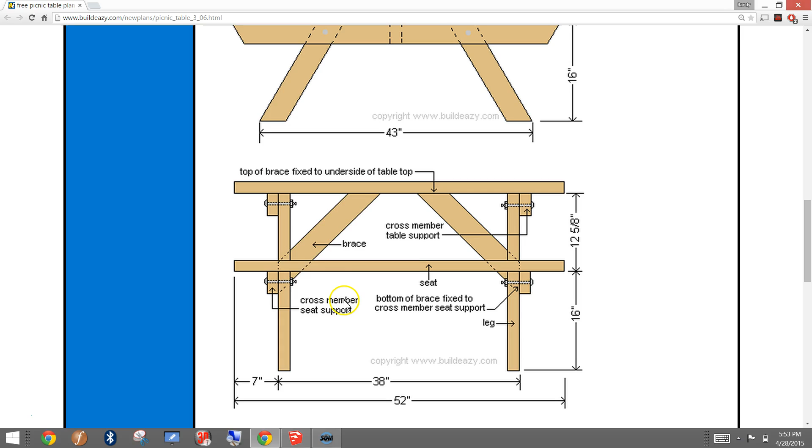This next section, I'm going to show you how to make the assembly here on the end, the A-shaped frame at the end. It's also going to include, for now, the brace. So we need the legs, which are these items. We need the two cross-member supports, and then the brace.

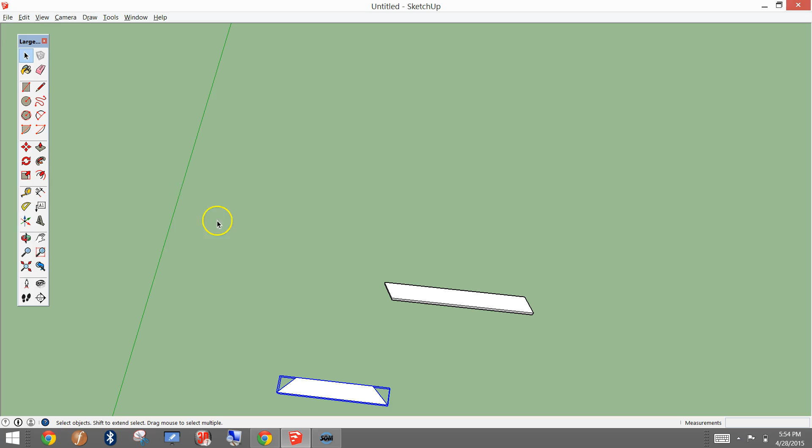So the rotation tool gets a little tricky. We're going to start by putting the legs up next to each other. Don't make copies of the components until you need it, just to keep things a little more simple. So we're going to take the leg here. We're going to use the rotation tool.

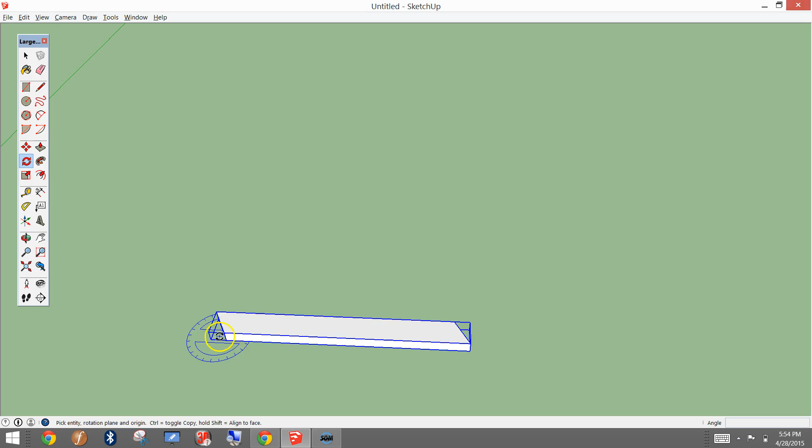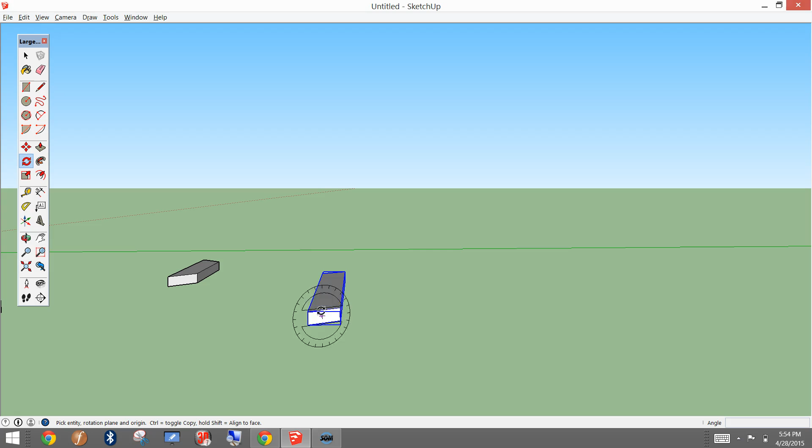Now, if there's one thing you remember, try and avoid when you get the black compass, because that turns things diagonally, and when you start turning it crooked, it gets a little more confusing. It's not impossible, but to avoid confusion, do your best to never, ever click with the black compass unless you really know what you're doing.

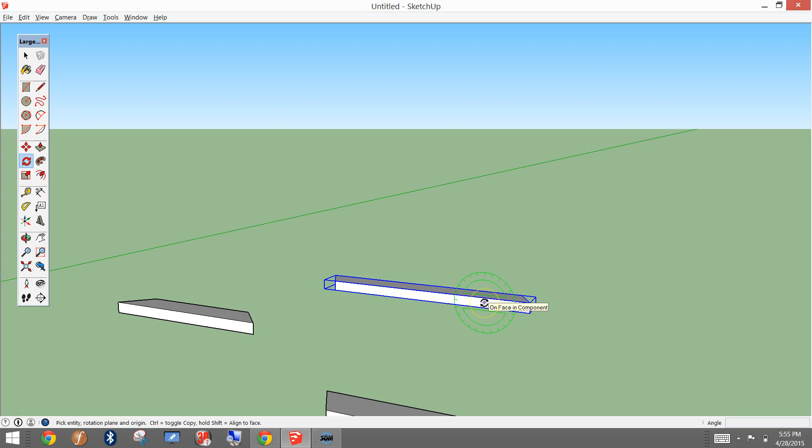So I need to tilt this up so that it makes this A shape. Alright, so it will spin things the way the circle goes. So for instance, if this green circle was spinning on my screen, it would almost be spinning left to right. So that is going to spin it that direction. So just like the compass tool, we want to click, wiggle it a little bit, click again.

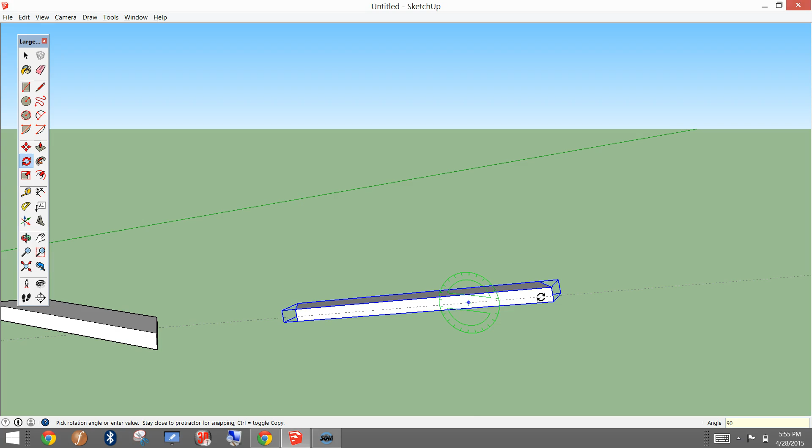Now you can eyeball it until it gets to 90, because 90 is going to be straight up and down, or we can just type in 90 degrees. So that is a good step one there. All right, and be sure as you do this to rotate, change your view, move things around, move the screen so you can see things better.

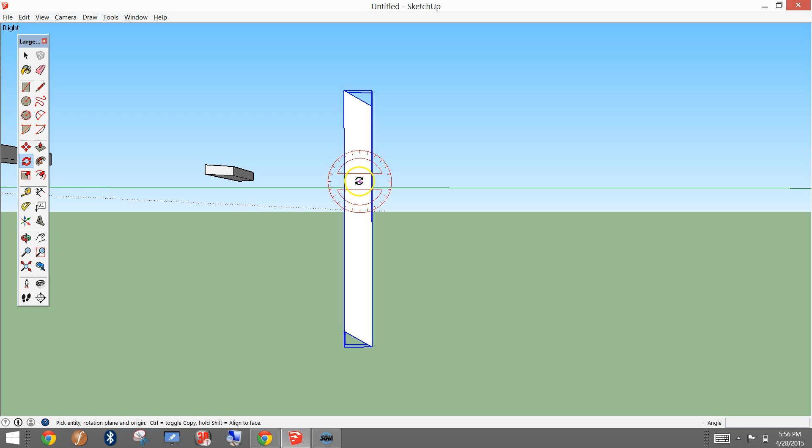Now, we'll need to rotate this, oops, I made a mistake. If you get two dots, the two dots is also bad news. You want to click once and click again, you really just want one dot.

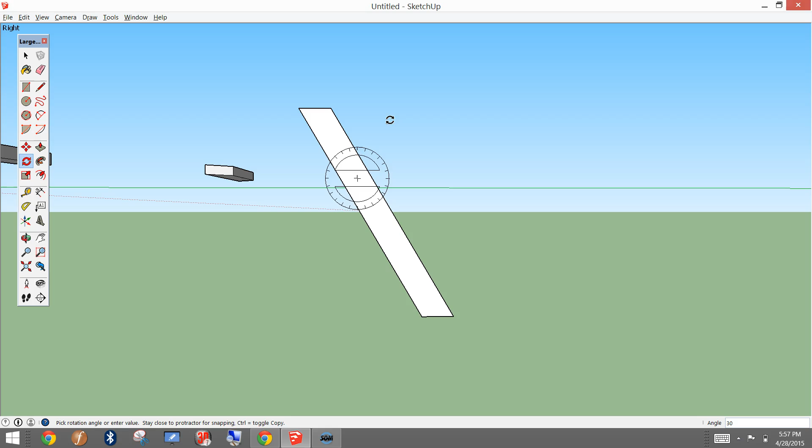You need to rotate this on the red axis now so that the very bottom of the board is flat with the ground. You can eyeball it, so we're going to rotate it 30 degrees, or you can simply type in the 30 degrees, or it might even be 60. I just forget complementary and supplementary, but it depends on what angle you start at. So now we have this sitting upright. I'm just going to move this over a little bit, give myself some more space.

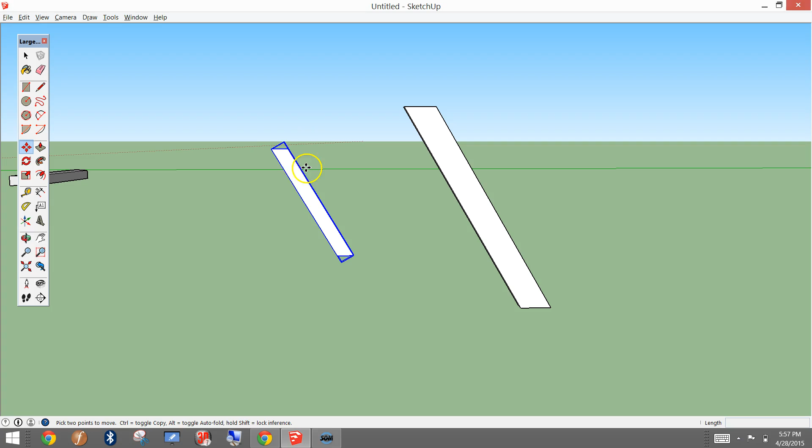So now I'm going to copy this component. You can use Control-C and Control-V to paste, or you can use Control and the Move tool, whatever works for you. So I'm going to get this, oops, I'm using the rotate tool. All right, I'm going to get this in the neighborhood. Well, first, obviously, we got to flip this around. So I'm going to use the rotate tool again because it has to face the other way.

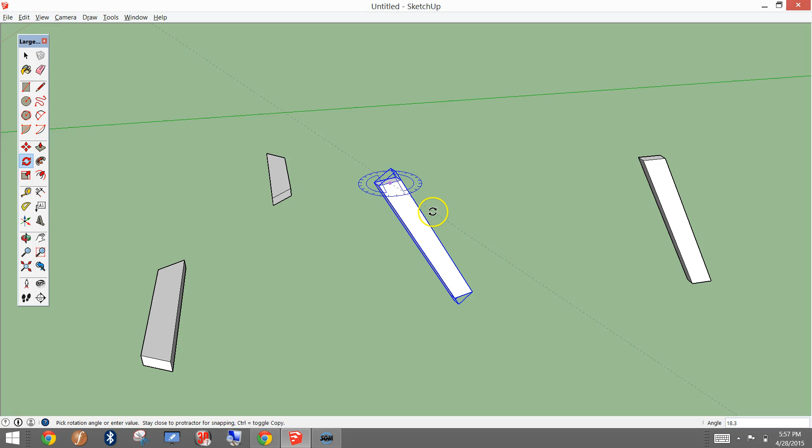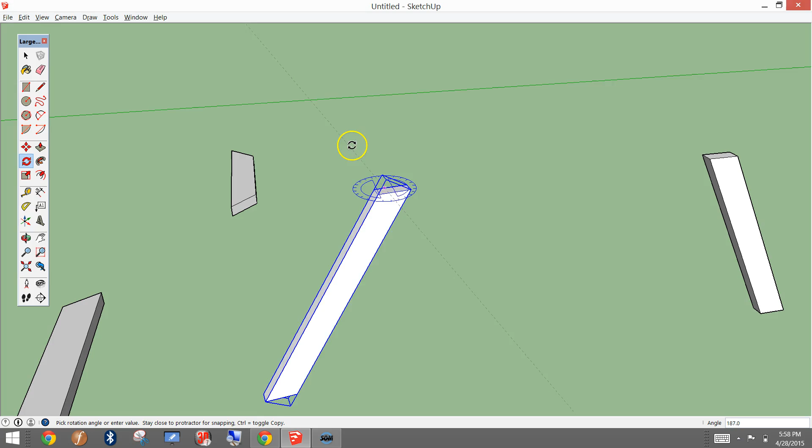You're going to see now the blue compass and how it's going to spin this way flat, because that's where the blue compass is. Now make sure when you click the second time, you have one dot here. That's really important. So we're going to spin it around. We want to do a 180 with it. We can guess, or we can simply type it in and give it a 180. Now these are going to be lined up, facing the way these should be.

Now looking at the diagram here, I can see that from this corner of this leg to this corner of this leg is 10 inches. So I'm going to use the tape measure tool here. I'm going to make a guide that is 10 inches. Typed in 10, I hit enter.

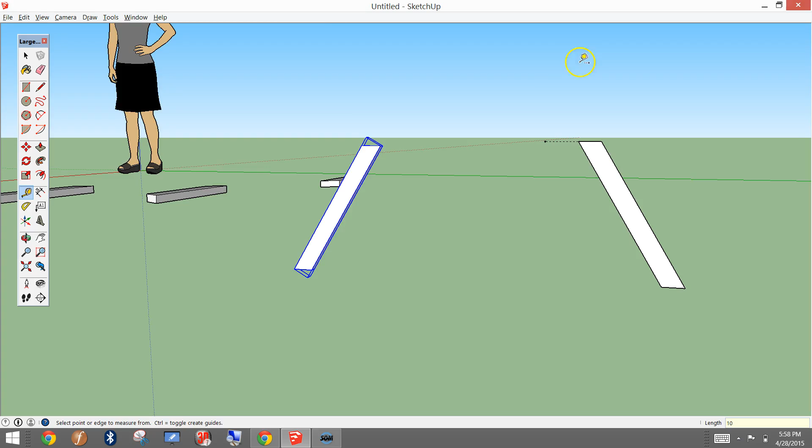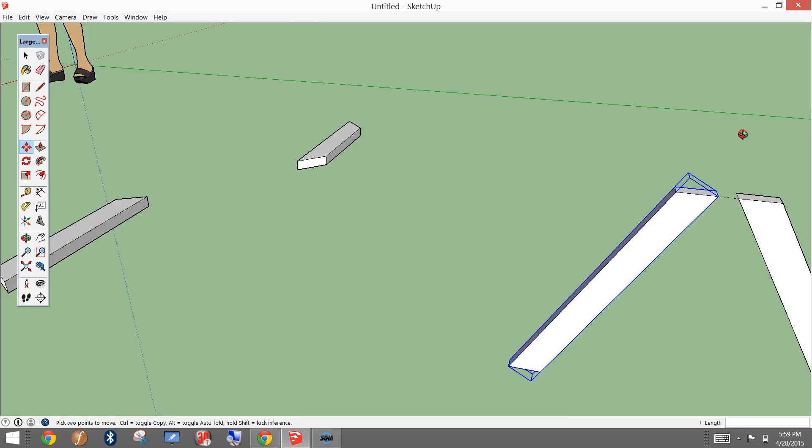And now I want this corner here to line up with this guide point here. If you actually grab the corner itself, drag it over to the guide point, it snaps it to the guide point. So you can put it exactly where you want it. That's very powerful. So again, those are 10 apart based on the diagram there.

Now, I want to put the cross member seat support in here. It's going to be 16 inches from the ground at this top point. And doing the math, I'm kind of telling you the math here, but if you do the math, this point is 4.5 inches horizontally away from the bottom of the leg here. So this is 16 inches. This is 4.5 inches. So that's going to tell us where to put the supports.

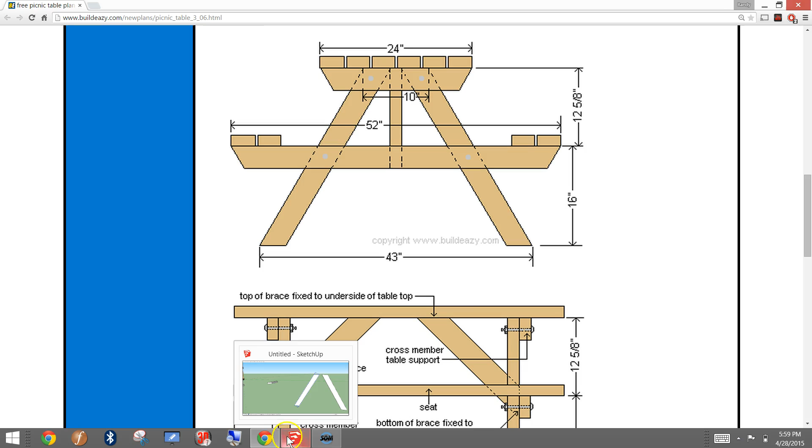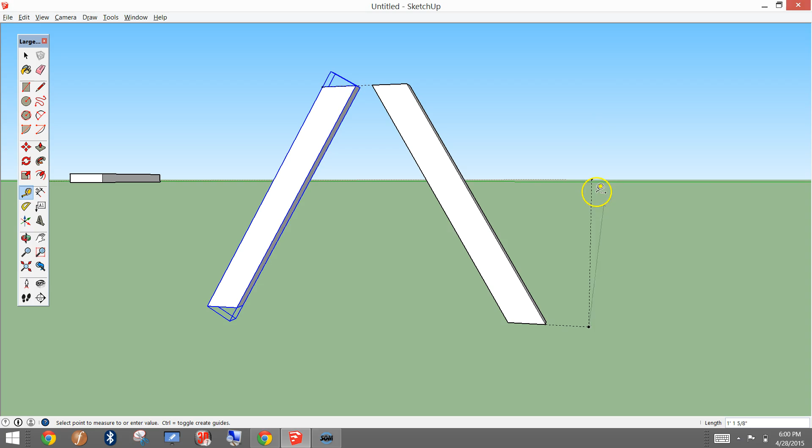So we want to measure one that's 4.5 to the right, and 16 up. So I'm going to put a guide point here. 4.5. Enter. And then it's 16 inches up from there, so it'll go straight up on its own. So 16. Enter. And then that's where that corner is.